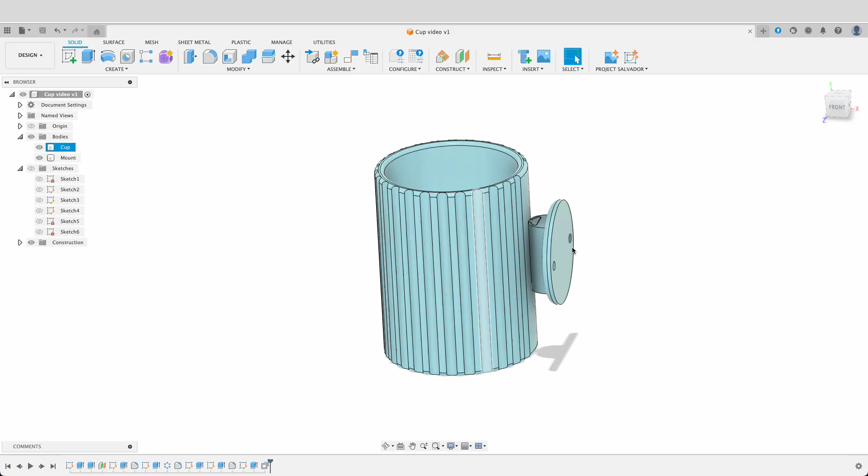Today we're going to be taking a look at how to make this little toothbrush holder. I call it a toothbrush holder, but it could be anything you want. It mounts to the wall and it's a cup. We're going to be taking a look at this little dovetail joint, how we put this together, and within 10 minutes you could have your very own that you can 3D print.

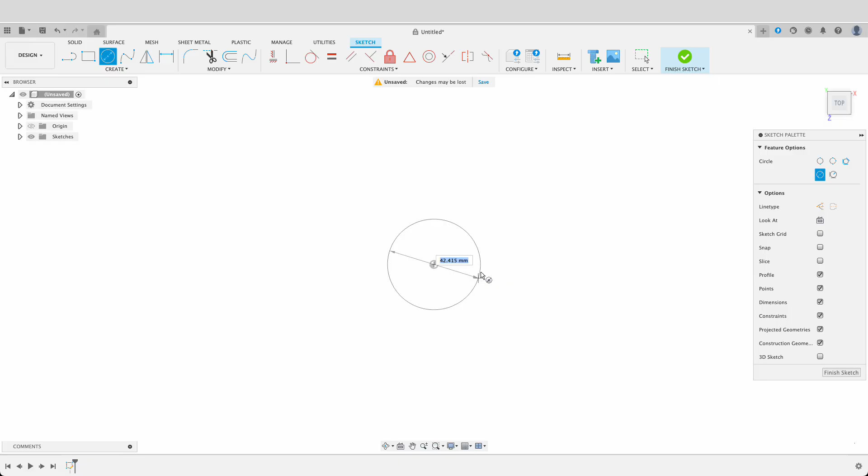So this design looks a little bit complicated, but it's actually quite easy. We're going to start off with a sketch on the top plane. It's going to be the inside and outside of our cup, so we'll make that first one. I pressed C for center diameter circle, make it 70 and 80, so we've got a 5mm thick cup.

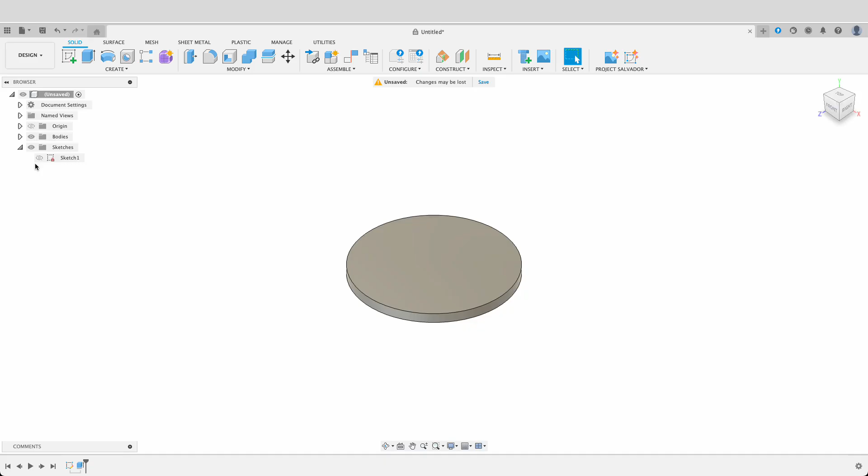I'm going to press E to extrude. I'll select both of them and go -5, so that'll form the base of our cup. Now you'll see our sketch is gone, so I'll just go back into the sketches and turn it on. Press E again, and there we go. We'll make that 100mm. So in 10-15 seconds we've gone from nothing to having a cup.

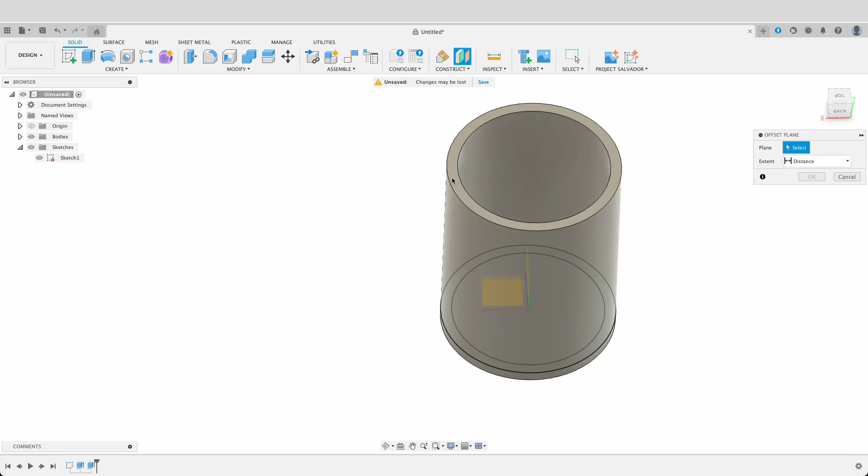Now what I want to do is make a little holder on the side. So I'm going to construct an offset plane from the top here, sort of a third of the way down, maybe right, a few millimeters off from a third, and create a sketch on this plane. Now if I push slice, you can see that's where we're going through.

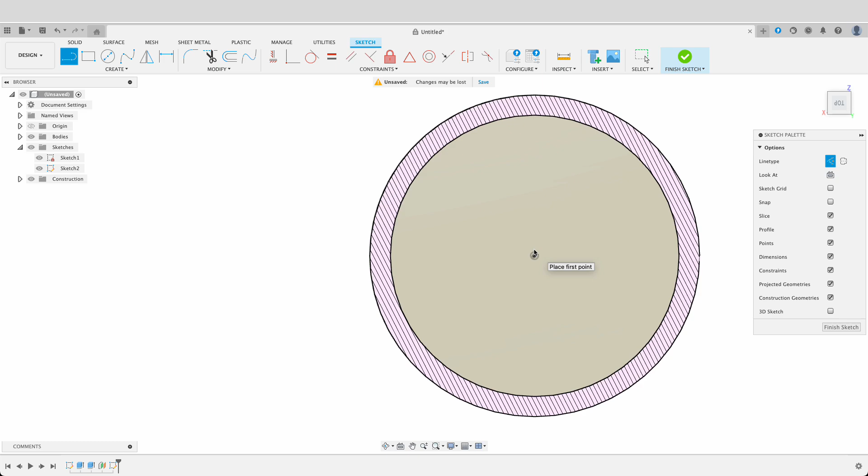So I'm just going to draw a reference line here, L and then X. X will give us a construction line. I'm just drawing this right across there so I've got something to reference. Now I'm wanting this to be like a dovetail joint, so I'm going to push L, deselect construction, and we'll go out to there.

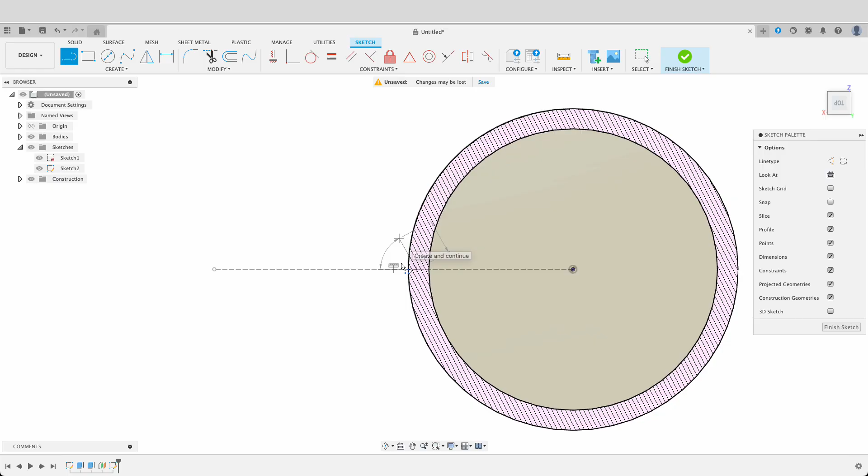What we'll do now is select mirror, so I'll mirror this. This isn't quite what I want, but we're mirroring across that line, and we can play with it a bit now. You can see because it's a mirror, it's given me control over both sides of it. And I think that's alright.

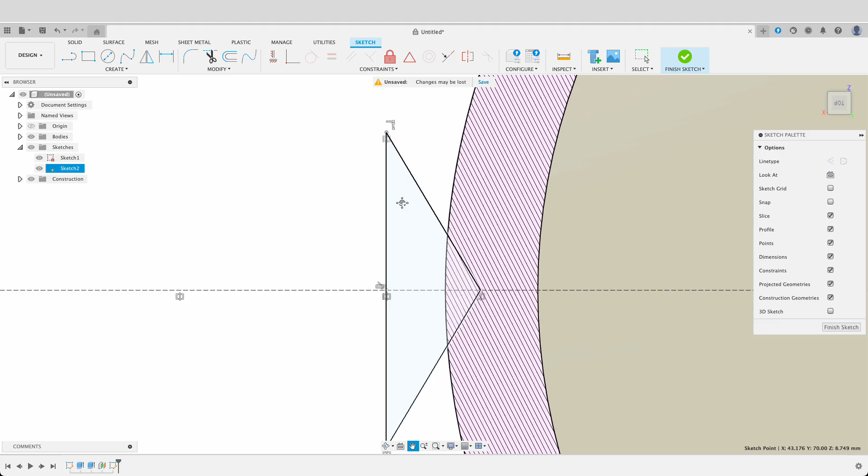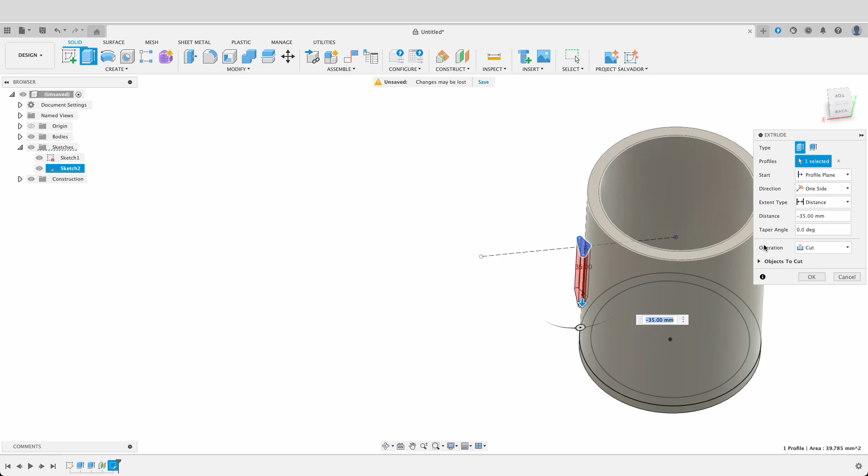We'll pop a fillet on this edge, make that 1mm, and we'll do the same on this side. There we go, so we got this little dovetail there. Let's zoom out so we can see it. I'm going to push E for extrude, and we're just going to drop that down, make it 35. That's good. So instead of a cut, I'm changing that to a join. Now if we look over there, we've got our little dovetail.

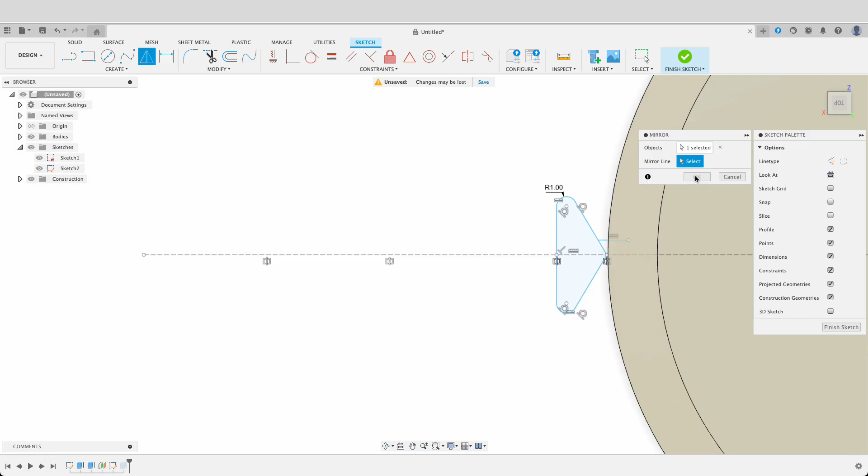You know, I think it's a bit too far in, so I'm going to go back into the sketch, zoom in here, pull it out a bit, or we'll grab one of these sides, just pull it back a bit, and then we'll draw this line coming in, and then I'll mirror it. Then I don't have to dimension it. It doesn't really matter what it looks like, or if it's a specific distance, just as long as they're equal. And then we just put a little fillet on it, and it rounds it out for us nicely.

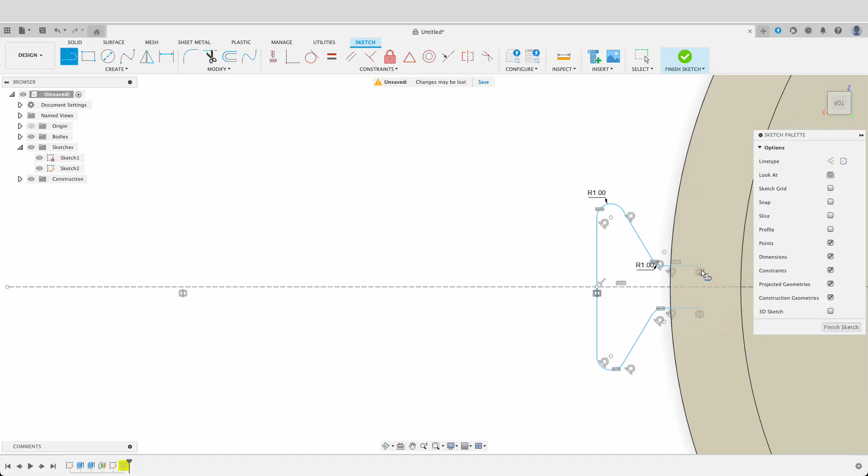So now I'm going to double click on this, and we're going to have to redo it. I'm going to have to close the profile, I'll join those two, I forgot to close off the profile. There we go, so it's updated nicely for us. We've got our mug. I'm just going to do a fillet on the bottom here, and on the top 2mm. We've still got a bit of a flat edge on top. What I'm going to do now is create a sketch on the top.

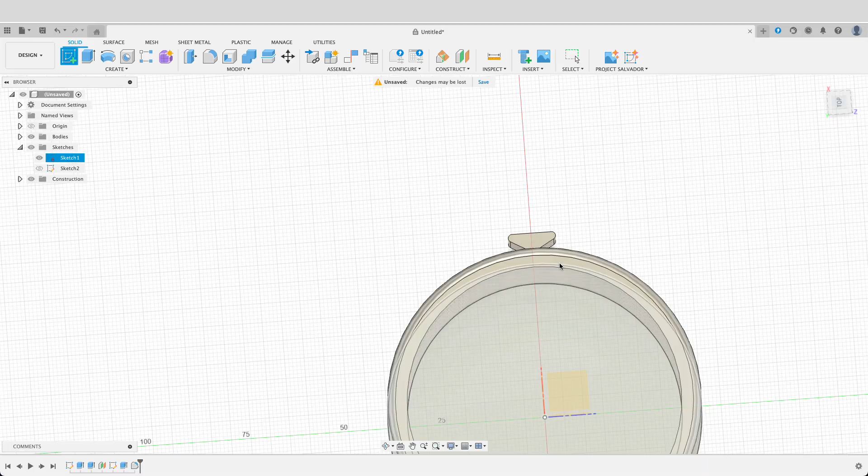I'm wanting to have a little semicircle coming in there, so we'll make that 6 mils, and we'll just put it somewhere like that.

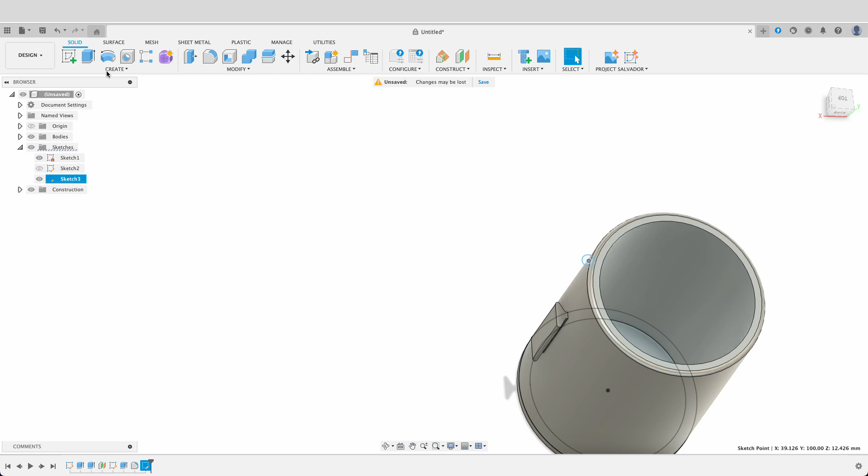Now what we're going to do is extrude that down. So now I'll press extrude, select that, drag it down, and we've now cut this shape in. And I want to run that all the way around.

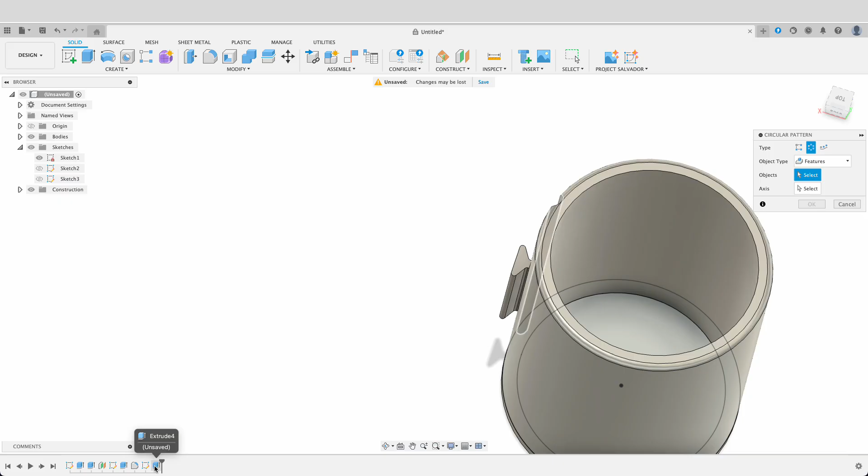So what I'm going to do is go to create, and we'll select pattern, circular pattern. Now we'll change this from bodies to features. So I've got my features there, and the feature is that extrude. The axis will be the circular axis.

Now over here we can say full or partial. I want it partial because I want it to stop sort of across from that one, so that we don't run through our holder thingy, the little dovetail.

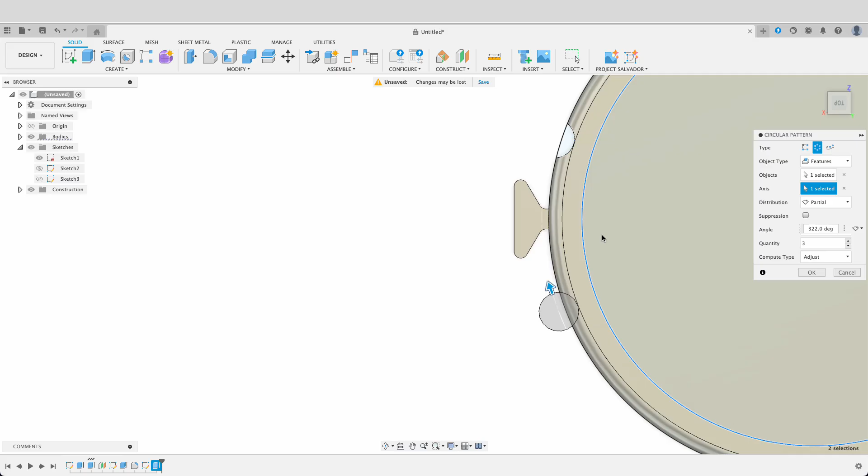So this isn't going to be exact. I think we can maybe go, that's about right. Remember, this is art. Let's call it art, then we don't have to be perfect.

So I'm going to change this to like 40, because that's too many. 30, 25. Okay, so now we look at it, we've got this nice little sort of pattern on there, which is quite nice.

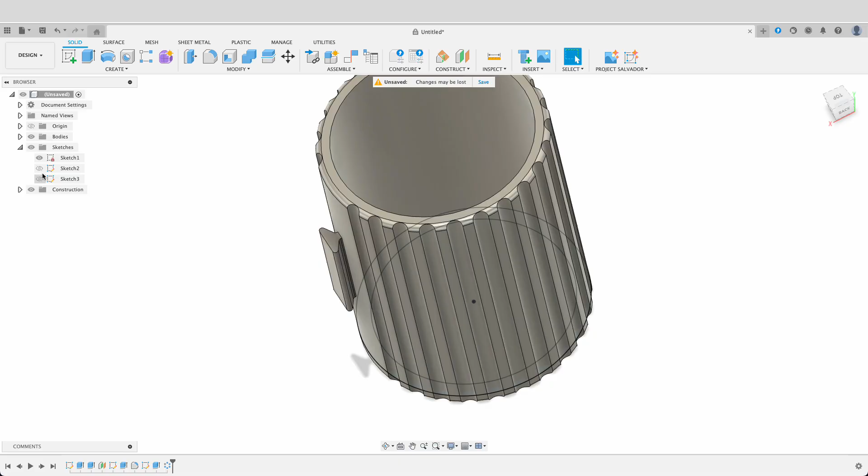And just going to turn that off. Suppose I can put a fillet here. So again, I press F, select this, and 2. There we've got that internal fillet.

So we've got our little cup portion. What we need to do now is have something that sticks onto the wall. So I'm going to create a sketch over here, and I'm going to project this. P for project. And okay, now I need to draw something that's going to kind of wrap around that.

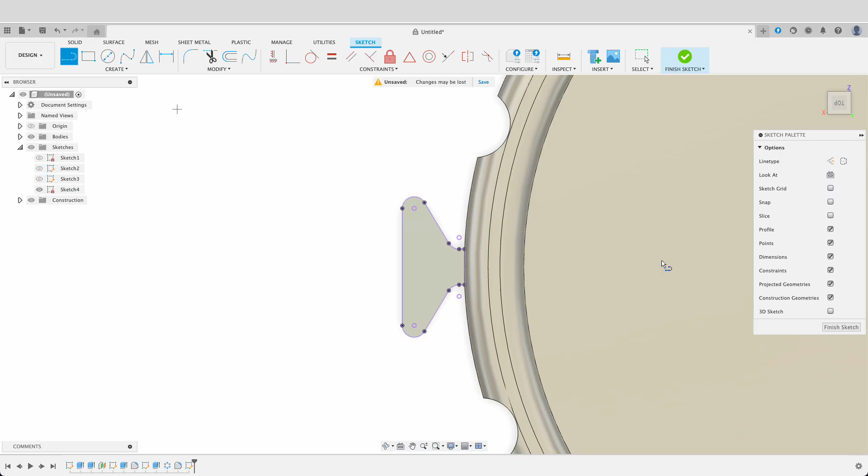So let's do, not a mirror, I mean a line tool, and we'll select line type as construction. If you see there, I hover over it, you get that little triangle. That means it's the middle of that line. The reason I'm doing this is because today I feel like doing mirrors.

When you're doing irregular shapes like this, I've selected the spline tool. I'm just going to turn off line type, construction.

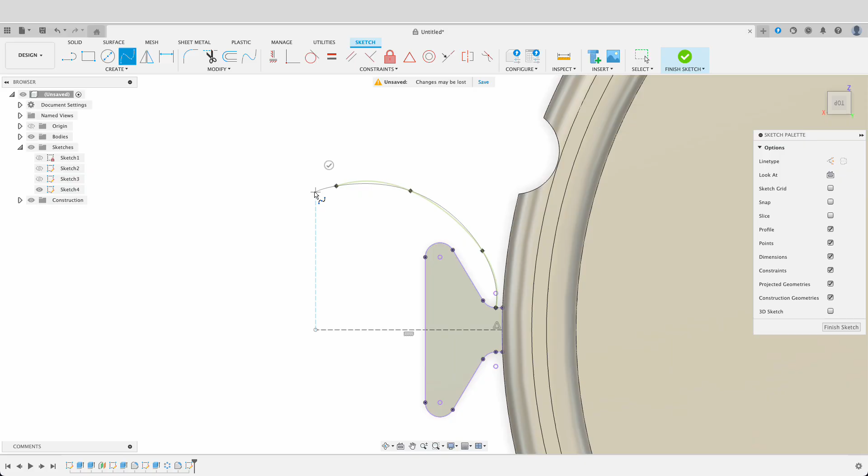So we'll kind of get that in line with that, I guess. Doesn't have to be too big. It's actually probably way too far. Let's change it up a bit. Maybe bring that in.

Okay, draw this line straight down. And then we can mirror it. So I'll mirror that, select our mirror line.

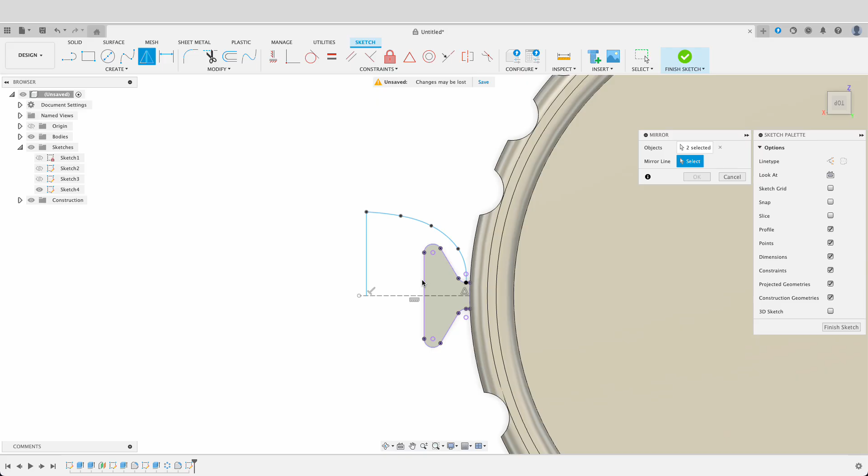Okay, now we've got these closed profiles. So I'll select OK, and E for extrude.

Now if you remember, this was, I think, 35. So we got 35 mils there. Make sure it is a new body. Okay, so now we've got these two bodies.

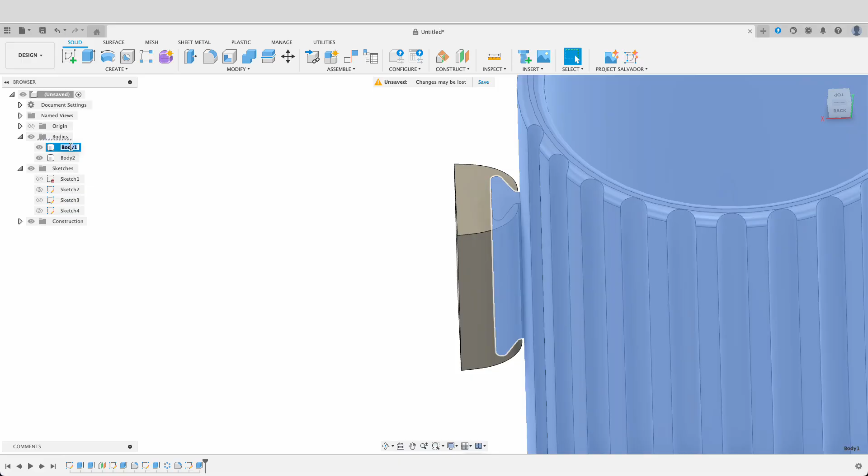We've got the cup, and we'll call this one mount.

Next step, we're going to draw something on here, like a little circle profile. So all I did was create a sketch on this surface. I'm going to push P so I can get the outline. Selected it, you can see it's there in purple.

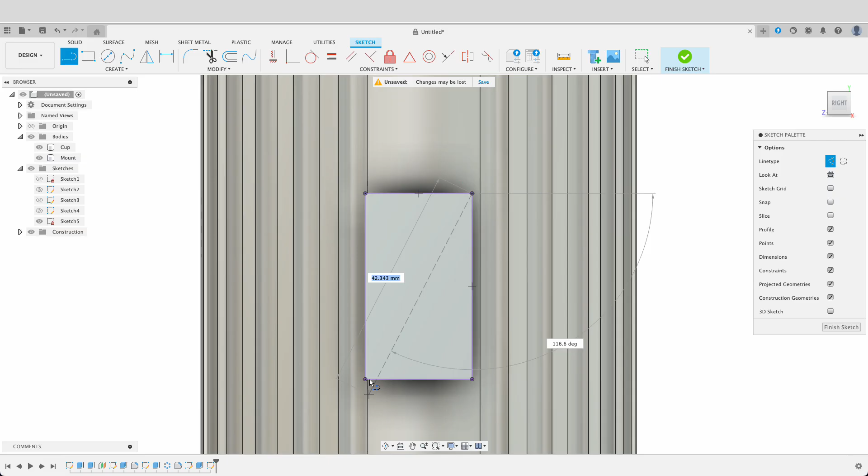L and X, because I'm going to just draw this across here. There's many ways you can go about getting the center, but I choose that way. C for circle, center diameter circle. X to remove our construction line type.

And this has kind of got to be big enough to have little holes on the side, so let's make it 56. And then C, we'll put it horizontal with that, and 5 mils. That should give us enough space to put in a hole or drill.

And I want to set this, so horizontal, vertical constraint, the center there, and that. Now we can dimension it, 20 millimeters. So what we could do now is create another one of these or mirror them.

I'm going to do something different and just draw another one instead of doing more mirrors. So C for center diameter circle, and we've selected that one there. Now horizontal, there we go.

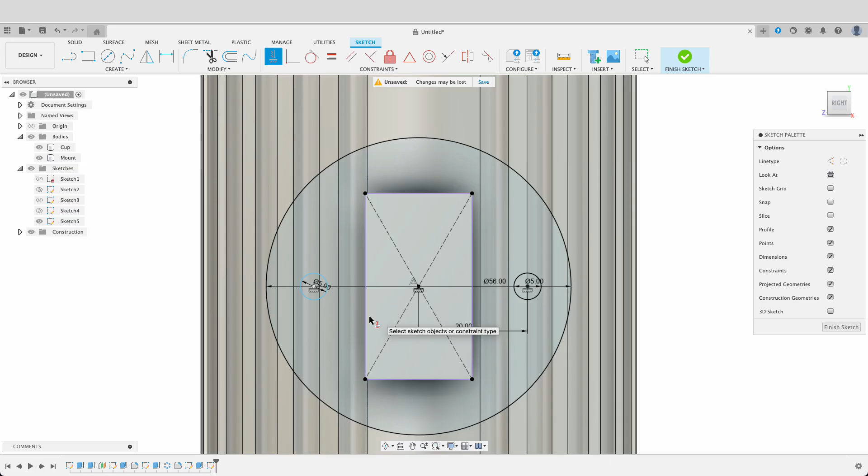And now D for dimension, we're going to make that 20 millimeters. Okay, so now we've got that profile. I'm just going to turn the cup off so we can do this extrude. So E for extrude. Notice I've left those

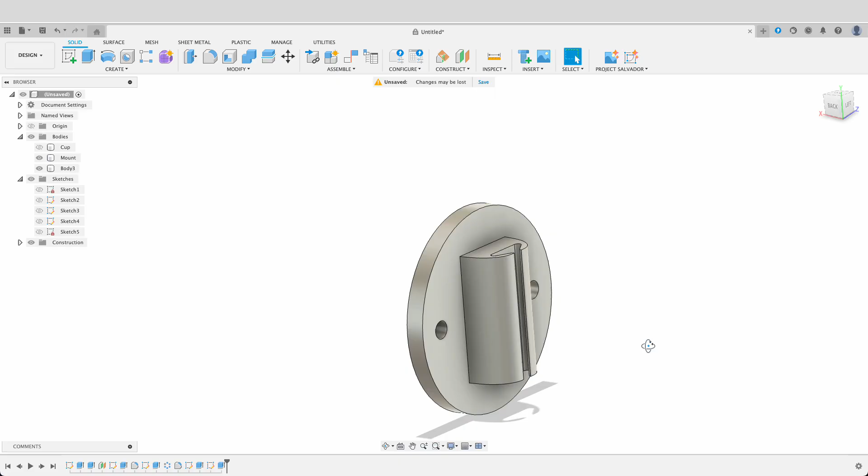holes as holes so that we can have space to plug it in. So I've extruded that. Now we're going to make it look nice. So I've pushed F so we can get a bit of a fillet on there. And let's see about putting a fillet over here. Just going to add anything to it.

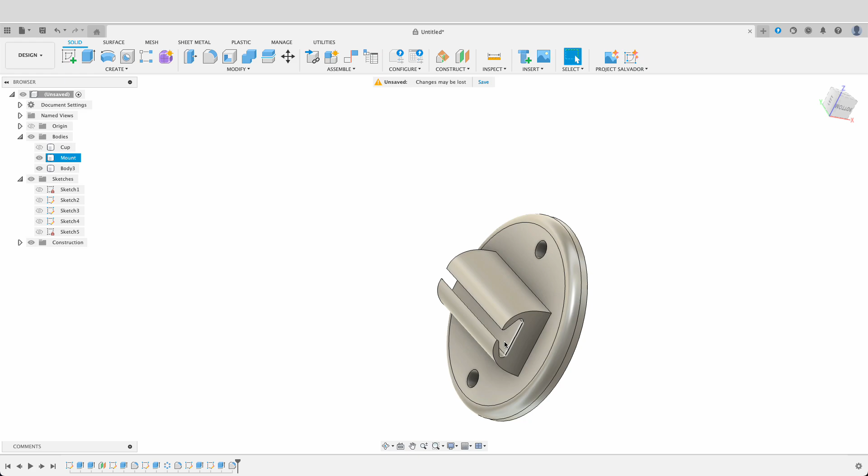Nah, I think we'll just leave it like that. But I've got a problem. I didn't think this one through. I've got to close this off or else it'll just slide straight through.

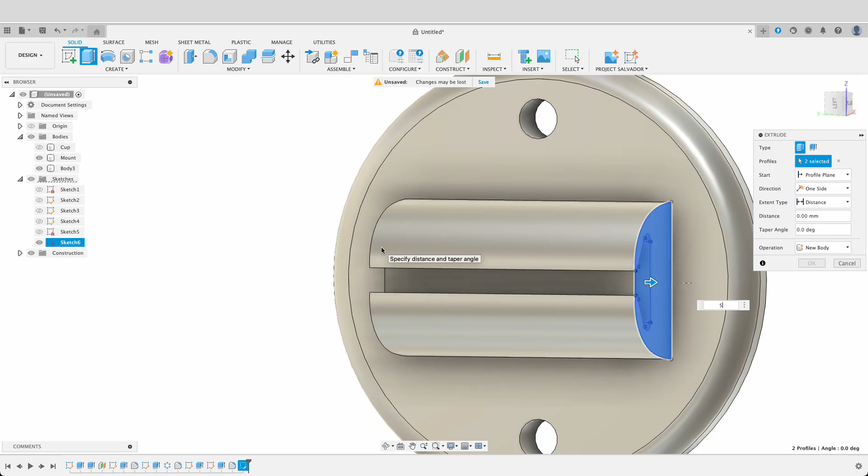So to do that, I'll draw a sketch on the bottom over here. P to project that. And then L, we'll just join these 2 points. And now we've got this whole closed profile. Finish sketch. E, we'll get this profile and that profile, and we'll go down 5 mils. Maybe make it 3. Now this isn't ideal because it's not perfectly centered now on top and the bottom, but it doesn't matter. It's up to you how you want to do it.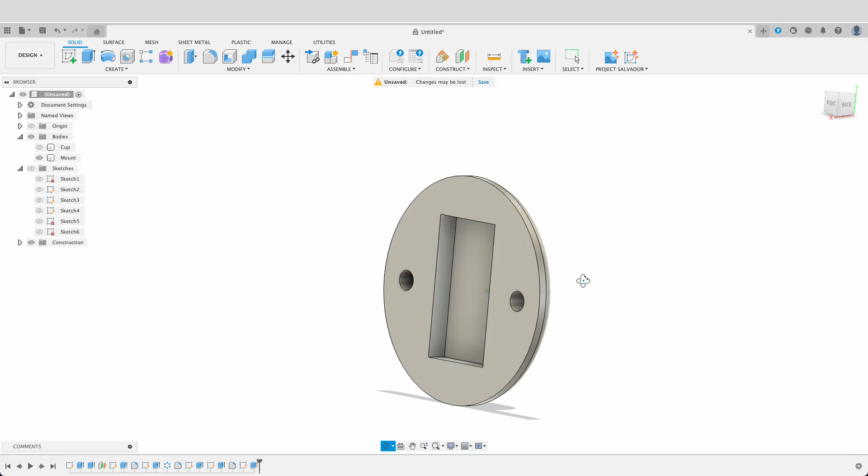Yeah, so I'm happy with that. Let's turn off our sketches, make sure we've got everything we need. Oh, I didn't notice that. Let's go back to that and select that. Else we're not going to get very far with that, are we?

Okay, now one thing, if you had to print this out, the tolerance between the cup and the mount will be like 0. So you'll have to hammer it in there to get it in.

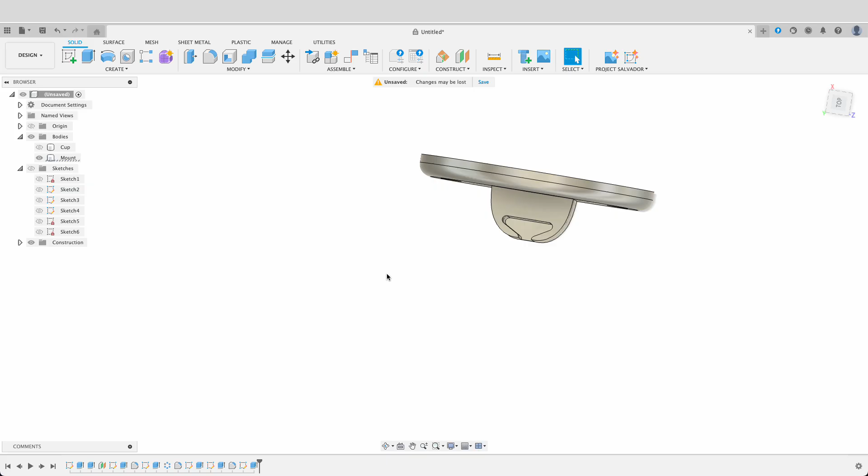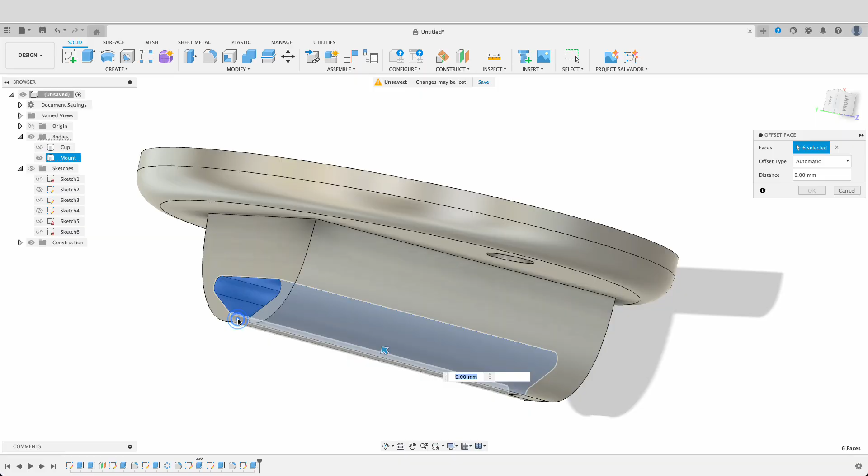What we can do, just turn that off. We can use the press pull. It doesn't always work how I want it to, but it is pretty good. We'll select all these sides. And then we're just going to offset it by a very tiny amount. See if we can get this front little bit as well. See if it lets us do that. Sometimes you do these things and there's just too many options and it can't compute.

So we're going to go 0.2. We want to go minus 0.2. Let's open it up a bit. Now if I turn the cup back on, you can see we've got a slight gap there.

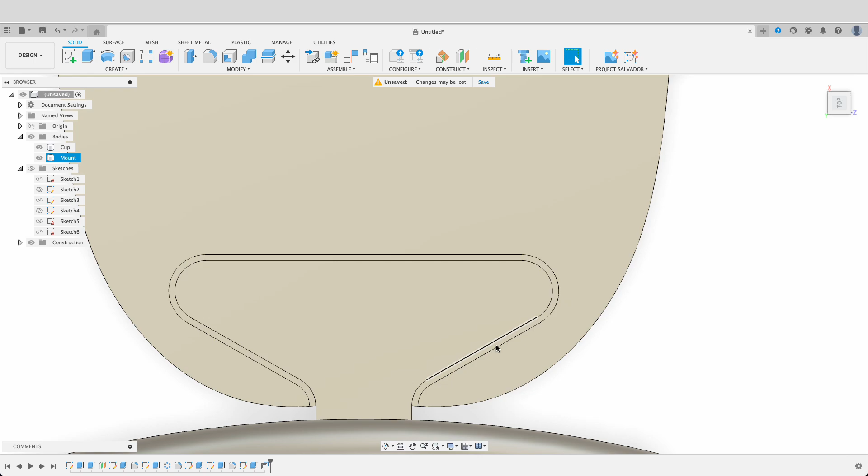Now with 3D printers, most of them have an accuracy of 0.1 mils. So you could have these two still touching, but I think with a 0.2 mil gap, it will look pretty good. And because we don't want it to just sit like this, let's add a bit of color to it.

So I'm going to press A, bring up the appearance menu, and we'll go for, what should we go for? Plastics. See what we got there. Don't want to just do anything plain. Okay, let's pick one of these and see what a white looks like.

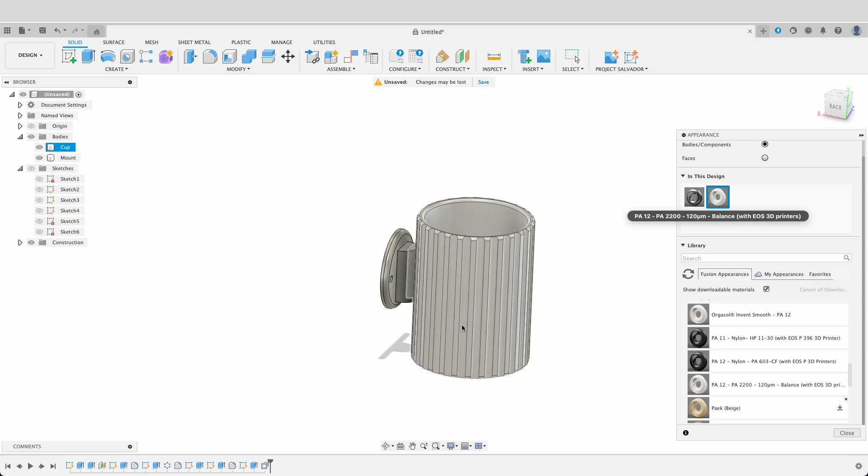Let's right click, edit. I was thinking something more like a greeny kind of pastel color. I say these words like I know what they mean. Pastel, I guess. There we go. My wife will probably tell me it's an awful color, but anyway, that's the picture I had in my head. So there we go. We've got our toothbrush holder. That really is an awful color.

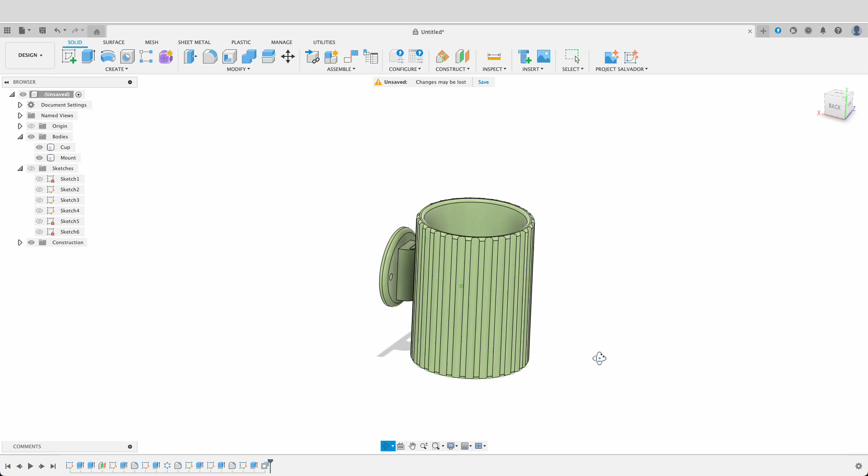Let's try something else. Right click, edit. My go-to is blue, so try a soft blue there. There we go. So we're going to print this out and see how it turns out. I think I only have white filament, so I guess this is going to be in white. So let's see how it turns out.